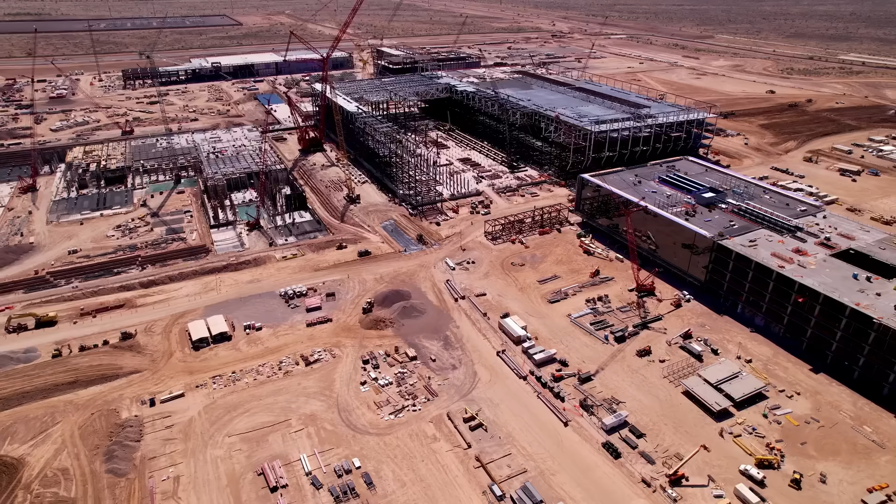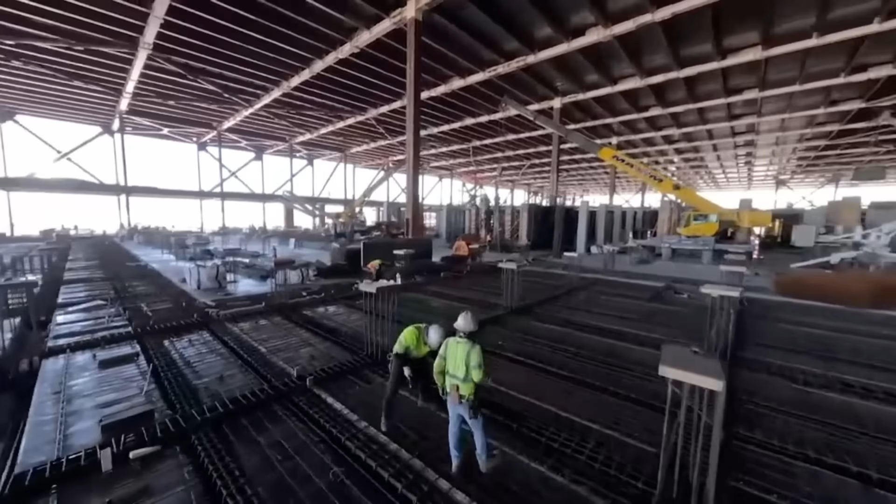In late 2024, a $40 billion chip factory rises from Arizona's desert, aiming to recreate the magic of TSMC's world-leading Taiwan fabs. The stakes are high. This is where chips for iPhones and AI supercomputers will be born.

Yet early on, engineers faced a baffling dilemma. The facility had to import ultra-pure sulfuric acid from 6,500 miles away in Taiwan. American suppliers couldn't meet TSMC's standards, and local chemicals cost 5 times more. Even Intel, the veteran US chipmaker next door, jumped in to buy from these overseas shipments, a fact TSMC's CEO relayed with incredulity: "How did you live before? It was very hard before, but now you are here," he recalls Intel saying.

This real scenario reveals a deeper mystery. Why is it so hard to duplicate a cutting-edge semiconductor fab on US soil? In theory, a chip plant is a marvel of precision engineering that should be reproducible anywhere. In practice, every tiny variable, from the brand of pump to the length of a pipe, can throw off the delicate process.

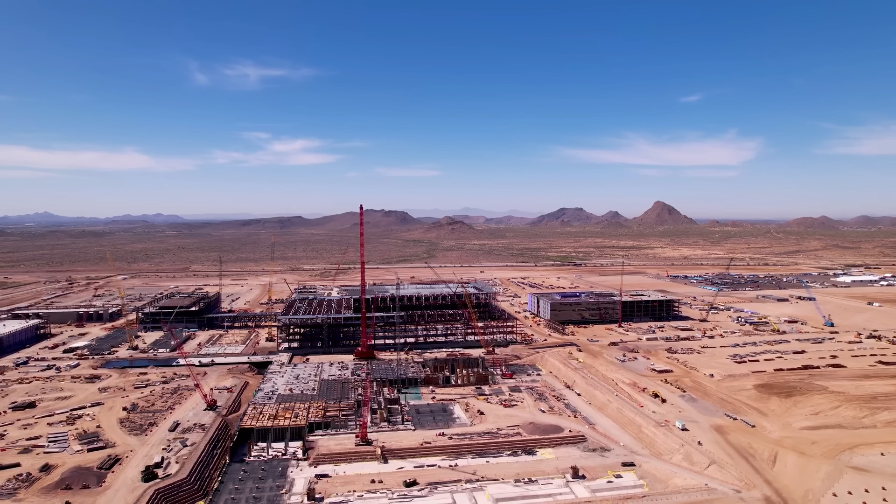The industry mantra is copy exact, meaning every detail must mirror the original fab to achieve predictable results. So when Taiwan Semiconductor Manufacturing Co. tried to clone its advanced factory in Phoenix, they encountered a storm of unforeseen challenges. This is the story of TSMC's attempt to copy-paste its success overseas, a story of smooth silicon dreams colliding with desert realities. We'll explore why a company that perfected chip making in Taiwan finds itself with a lot of sweat, tears, and all kinds of training in Arizona.

How do geology, water, and air in the American Southwest complicate processes measured in atoms? Why does a thriving supplier ecosystem in Asia prove so hard to replicate in the US? And what do these struggles mean for America's bid to onshore critical chip production?

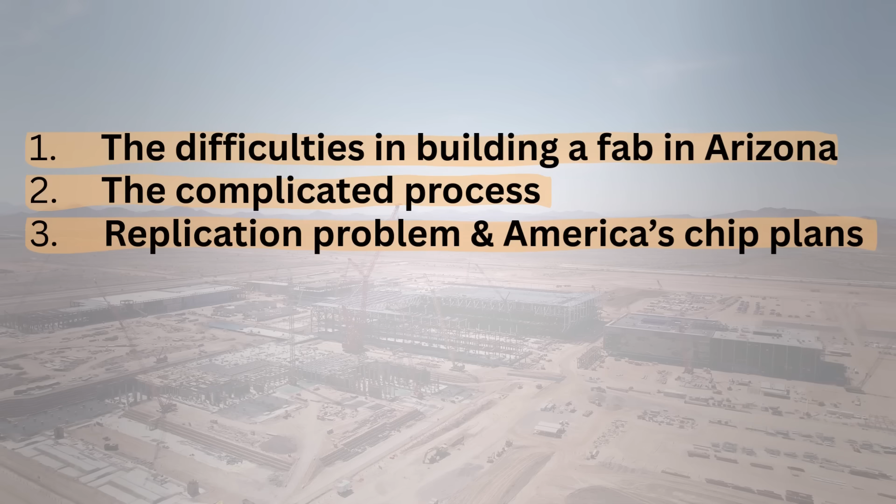TSMC, Taiwan Semiconductor Manufacturing Company, is the world's most advanced chip foundry, fabricating processors for Apple, Nvidia, and many others. In the semiconductor realm, yields are king. Yield refers to the percentage of chips on each silicon wafer that emerge flawless. A fab can churn out thousands of chips, but if even a speck of dust or a minor process variation causes defects, many of those chips become worthless.

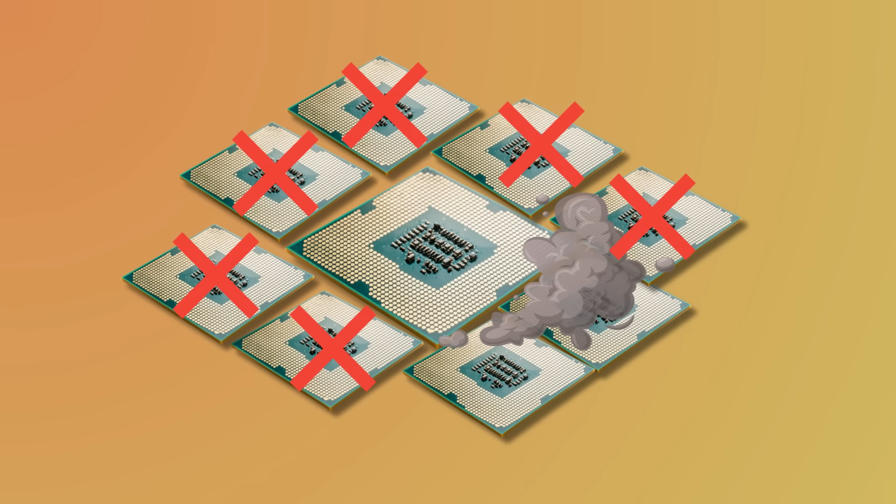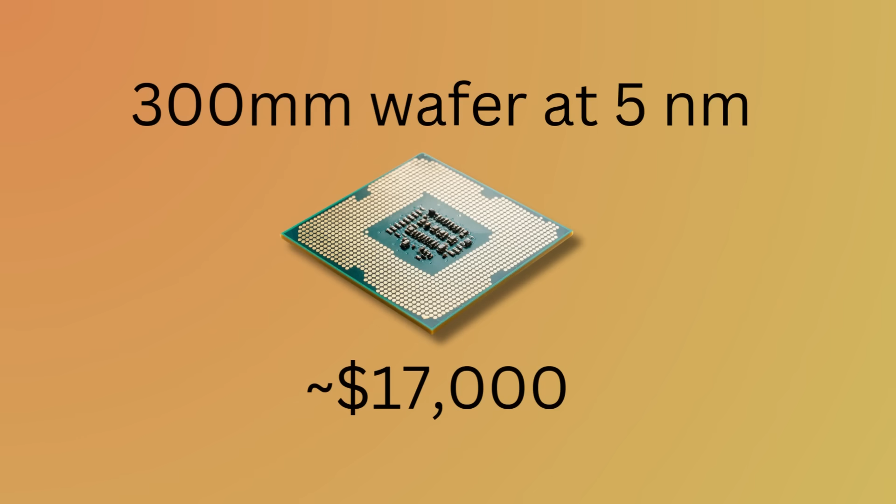Modern chips pack billions of transistors in areas smaller than a fingernail. Even a 4-nanometer wide particle can ruin a chip. High yield is critical because each wafer costs a small fortune. A single 300mm wafer at 5 nanometers can cost around $17,000 to produce. When yields slip, those costs explode.

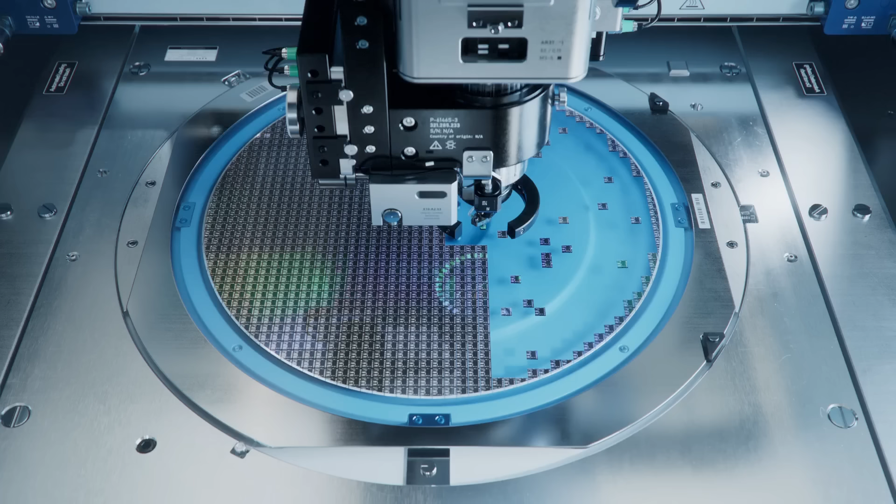As one engineer puts it, "Making a wafer is the most complicated manufacturing process in the world. I can't imagine anything else more difficult than this. It involves up to 4,000 precise steps with no room for error. The goal is to perfect those steps and repeat them exactly, over and over, wafer after wafer."

This is where the copy-exact philosophy comes in. Pioneered by Intel and embraced in spirit by chipmakers worldwide, copy-exact means that when you build a new production line or fab, you replicate every possible parameter from the proven facility. Same equipment models, same process recipes, same materials, down to using the same brand of valves, pumps, and filters, and even duplicating the lengths and routing of pipes and wires.

Why such obsessiveness? Because even trivial changes can produce different results at the nanoscale. The semiconductor process is a finely tuned orchestra. Swap a violin mid-performance, or a chemical supplier mid-process, and you might throw the whole symphony off key.

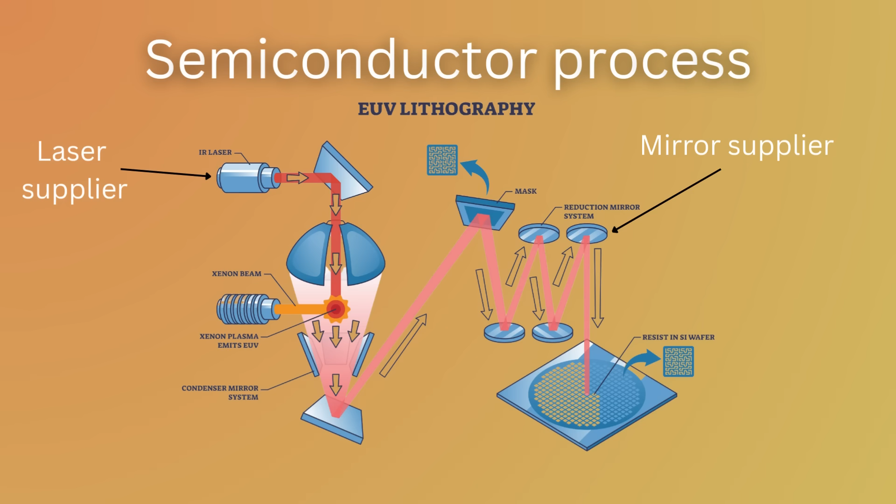Intel has credited its copy-exactly program with minimizing risk in new fabs. Since all factories use similar equipment, the copy-exactly process minimizes the risk of introducing errors when ramping up production. In other words, if you've perfected a recipe in one kitchen, you'd better rebuild an identical kitchen to get the same dish again. For TSMC, which leads the industry in chip yields and process technology, copy exact is an article of faith.

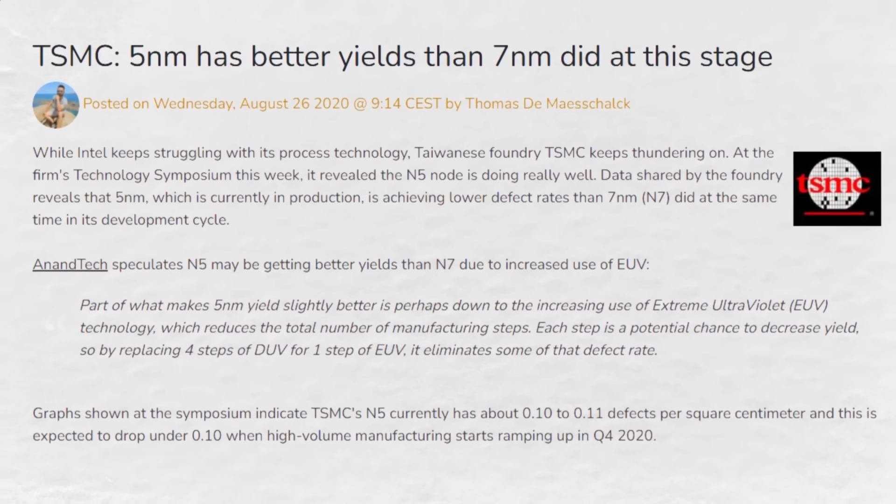It's how they achieve remarkable consistency. In 2020, TSMC boasted its new 5-nanometer process hit defect rates around 0.1 per square centimeter within months, meaning only one defect in a billion transistors or so. High yields translate directly to profit and production capacity. A few percentage points of yield can make or break a chip's economics.

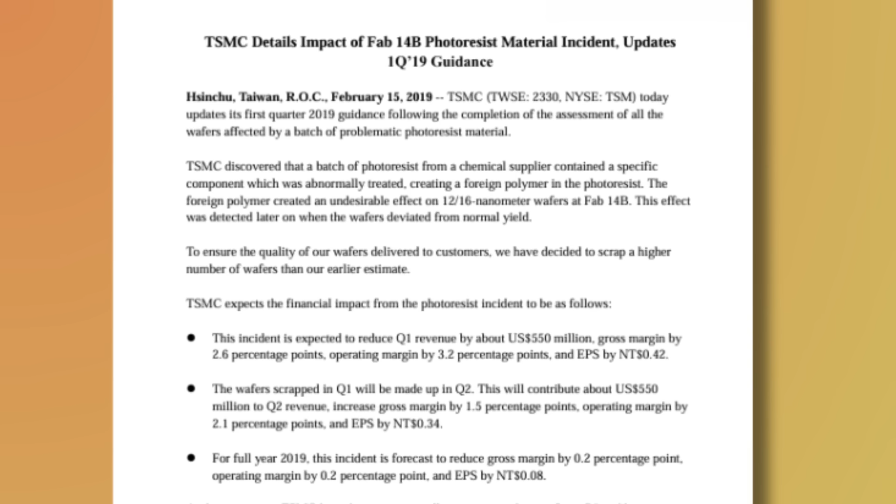Conversely, a yield problem can cost astronomical sums. A sobering example: in 2019, a single batch of bad photoresist chemical at TSMC's Fab 14 went undetected until wafer yields came out far below normal. By then, thousands of wafers were contaminated. TSMC had to scrap an estimated 10,000 to 30,000 wafers, eating a loss of about $550 million in revenue. One foreign polymer in a chemical, one tiny flaw, cascaded into over $500 million of damage.

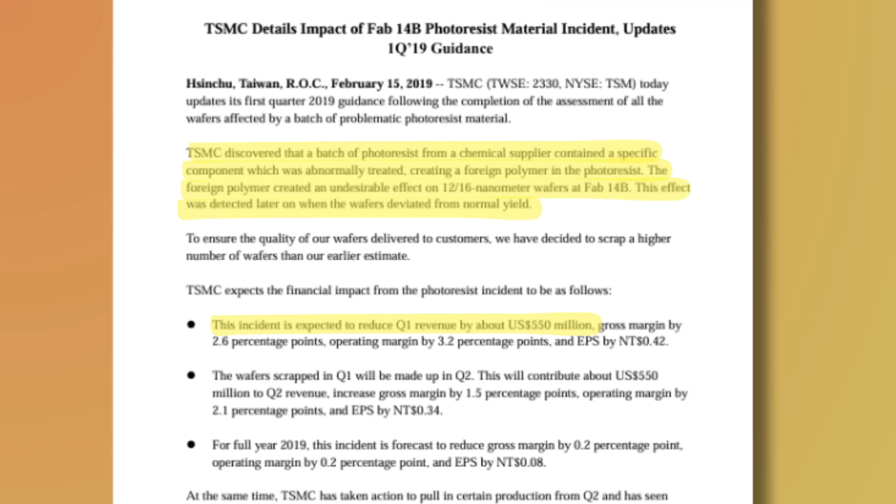This incident hammered home the point: vigilance over process consistency isn't paranoia, it's survival. So when TSMC agreed to build an advanced fab in Arizona, producing 5-nanometer class chips, later adjusted to 4 nanometers, for American customers, they knew the only way to succeed was to copy-exact their Taiwan operations.

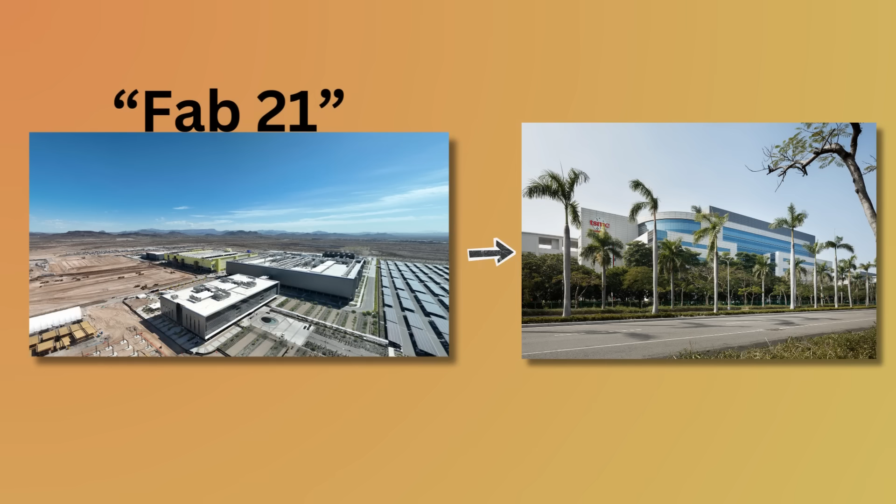The Arizona fab, designated Fab 21, would be modeled on TSMC's cutting-edge facilities in Taiwan's Tainan Science Park. In theory, TSMC tried to transplant not just the machines, but the entire manufacturing ecosystem that makes those machines hum. Yet almost immediately, theory met reality. TSMC's leaders candidly admit they underestimated what they were up against. Building the same fab on a different continent turned out to be far more complex than copying a blueprint.

Before we delve into the hurdles, let's frame why this duplication is so strategically important. The US government, via the CHIPS Act, is investing $52 billion to onshore semiconductor manufacturing. Washington's goals are part economic, jobs and tech leadership, and part geopolitical, reducing reliance on Asia's chip hubs, especially Taiwan, which lies under constant shadow of potential conflict. TSMC's Arizona project is a flagship of this effort, supported by an estimated $6.6 billion federal grant and other incentives. If TSMC can make top-tier chips in America at scale, it would bolster US tech sovereignty and mitigate the single point of failure risk of having so much capacity in one small island.

But if the Arizona fab struggles to meet the quality or output of its Taiwan siblings, it raises tough questions. Can the West really rebuild a self-sufficient semiconductor supply chain? Or are decades of specialization and clustering not so easily unwound?

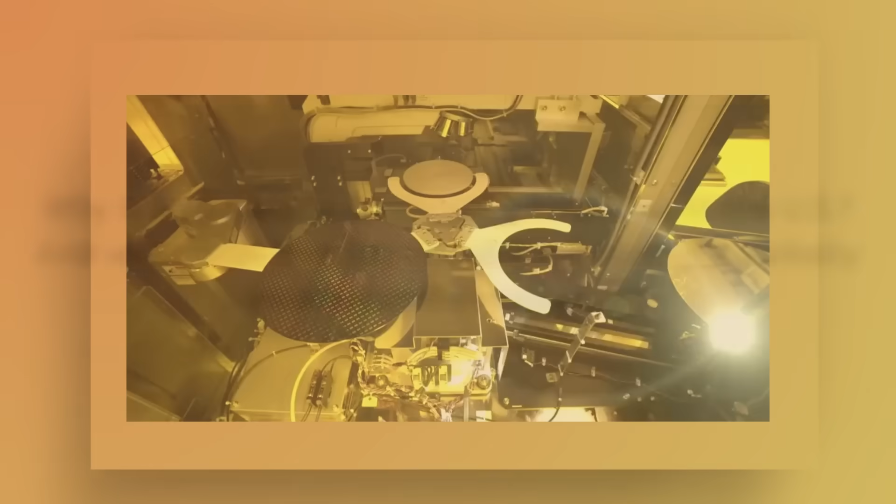As we unravel each challenge, the central mystery unfolds. Why is it so hard to duplicate a TSMC fab in the US? And what does that say about the future of a globally interdependent industry?

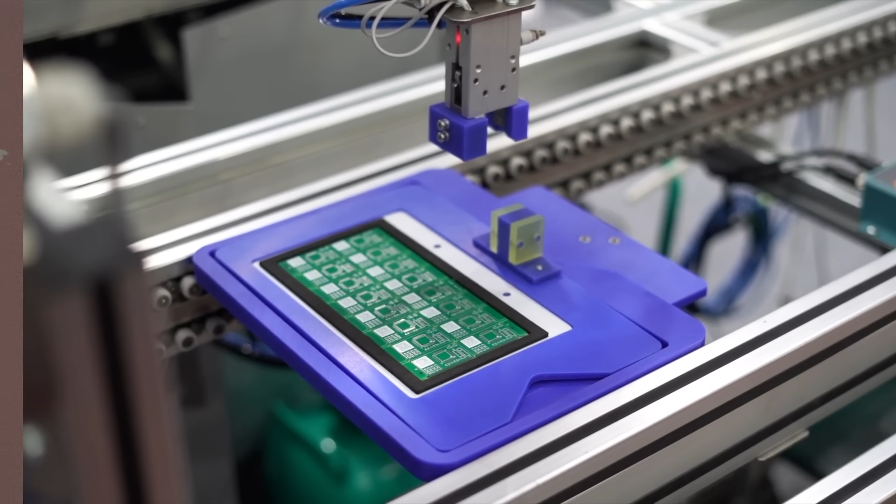Building a chip fab is not like building a typical factory. It's more akin to constructing a giant scientific instrument. These facilities are exquisitely sensitive to vibration, temperature, humidity, and contamination. Geology matters. Fabs need geologically stable ground with minimal risk of earthquakes or even subtle tremors that could disturb alignments. Chip manufacturing operates on tolerances of a few nanometers, billionths of a meter, especially in lithography, where a misalignment can ruin all the chips on a wafer.

In Taiwan, TSMC has learned to mitigate frequent minor earthquakes, for instance, using deep foundations and vibration dampers to isolate tools. Arizona, on the other hand, is geologically quiescent. It's not on a major seismic fault. In fact, this was one attraction. Beyond water, chip fabrication requires geologically stable ground, low humidity, and a positive business climate, notes Paul Westerhoff, an Arizona State University engineering professor. By that measure, the desert north of Phoenix is ideal, solid bedrock and little natural shaking.

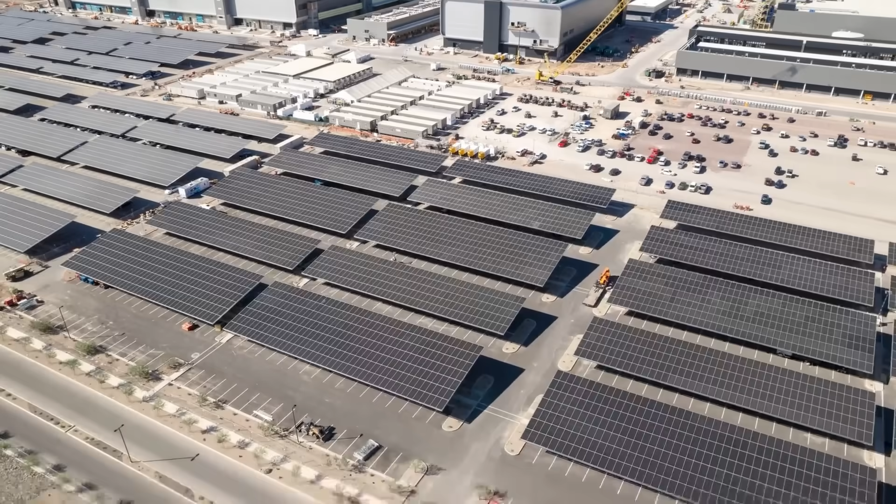But being stable isn't enough. The site must also be prepared to absorb man-made vibrations from nearby roads, construction, etc., and support extremely heavy equipment. A single EUV lithography machine, for example, weighs over 100 tons and uses lasers so sensitive that any vibration can blur the microscopic circuits it draws. Arizona's site had to be graded and its fab foundation meticulously engineered for this task.

Water is another silent factor. Fabs slurp tremendous volumes of water to achieve the required cleanliness. Semiconductor manufacturing demands ultra-pure water, UPW, to rinse wafers after various process steps. Ultra-pure means water stripped of every mineral, every ion, virtually every molecule that isn't H2O. It's often said this water is so pure it's unsafe to drink, as it would leach minerals from your body. Each wafer might be washed dozens of times through its fabrication. A modern logic fab can use millions of gallons of water per day, enough to supply a small city.

That sounds incompatible with an arid region like Arizona, which faces chronic drought. Indeed, observers scratch their heads. Why build such a water-intensive plant in the desert? TSMC, conscious of this, pledged advanced water recycling. In Taiwan, during a drought, TSMC has even trucked in water to keep fabs running, so they know water risk well. In Phoenix, they are building a state-of-the-art industrial water reclamation plant on site.

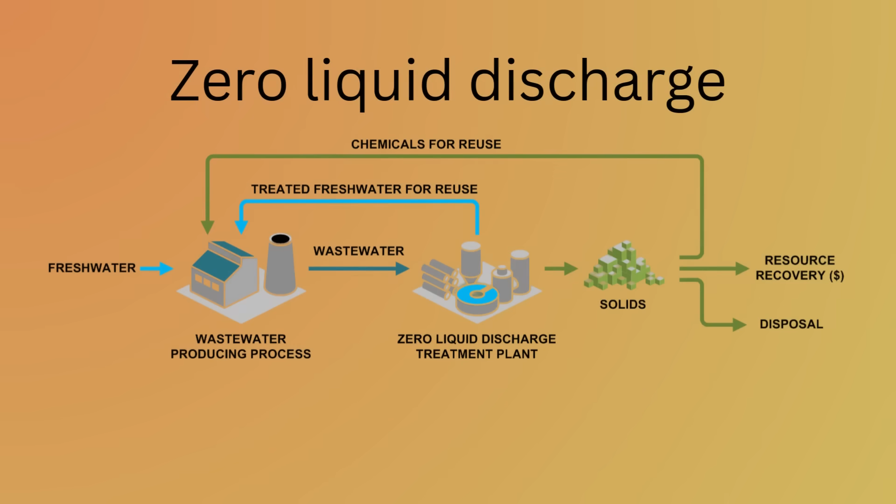TSMC Arizona says it will reclaim about 65% of the water it uses, with a goal of eventually reaching near 100% net zero water use. Essentially, they plan to treat and reuse wastewater for cooling and other non-process uses, and possibly even repurify some of it back into UPW. This approach, known as zero liquid discharge, means almost no wastewater leaves the facility. It's costly. Fabs in Arizona voluntarily do zero liquid discharge. It costs them a lot more. But they do it because it is part of operating in the desert, Westerhoff explains. Over time, these conservation measures can make Arizona's fabs among the most water-efficient in the world.

Ironically, being in a water-scarce area is spurring innovations that could set new standards globally for water recycling. However, not all water challenges are purely quantity-based.

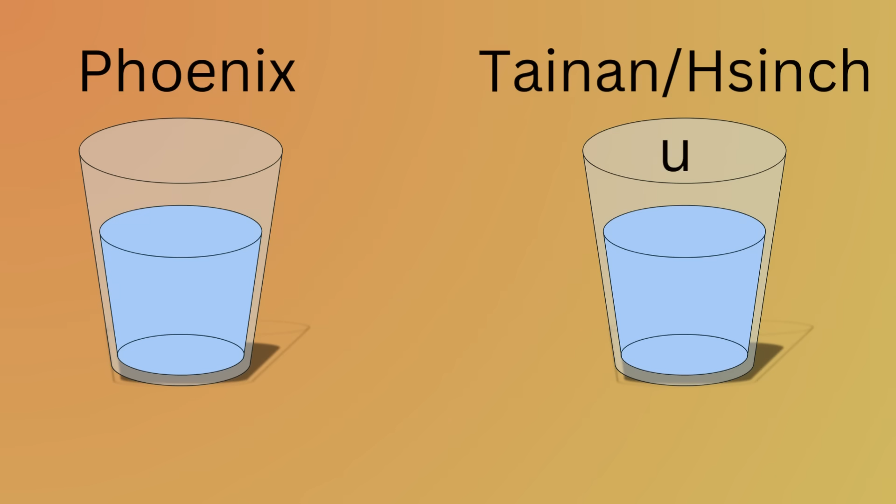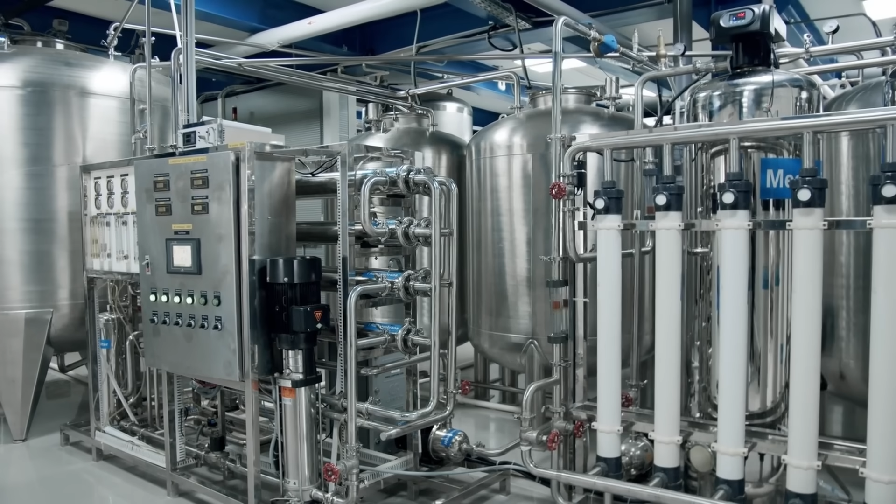Water chemistry differs by locale. The raw municipal water in Phoenix has a different mineral profile than Hsinchu's or Tainan's water. This affects the filtration and purification process. TSMC essentially built a duplicate ultra-pure water plant in Arizona, but slight differences in input water could mean tweaking the

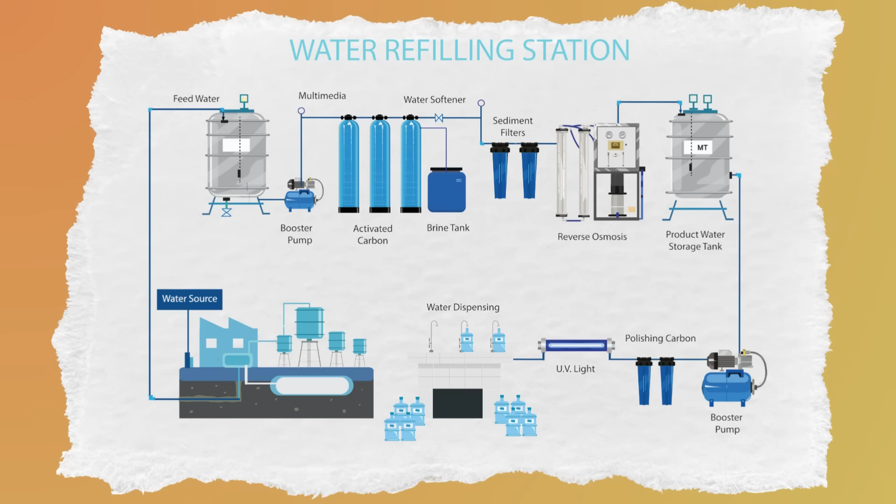treatment stages, more filtration here, different membrane there, to reach the same purity. Moreover, once purified, the water must stay pure through miles of piping, an area where the copy-exact philosophy kicks in. If the Taiwan fabs use stainless steel pipes of a certain grade and length, the Arizona fab would try to use the exact same to avoid unexpected leaching or contamination.

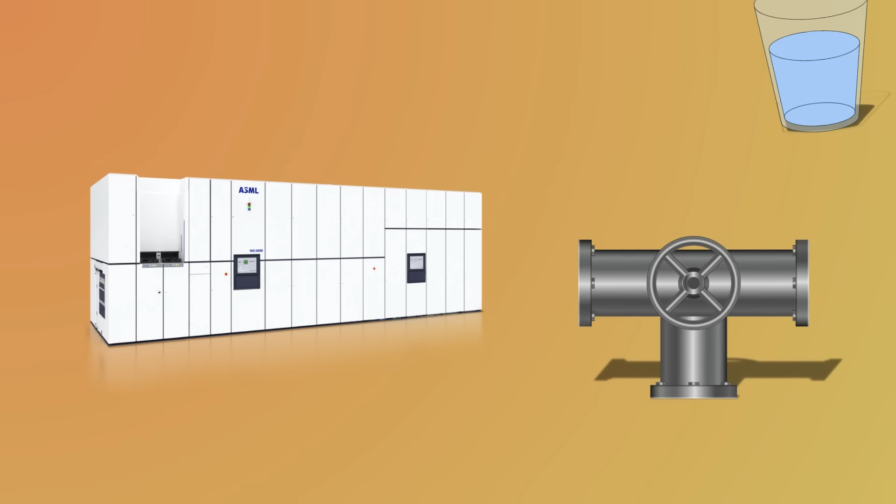This level of replication can be surprising. It's not just the big tools, but even piping materials and lengths that matter. In the end, after intensive effort, TSMC is confident its Arizona water treatment system can deliver equally pristine H2O.

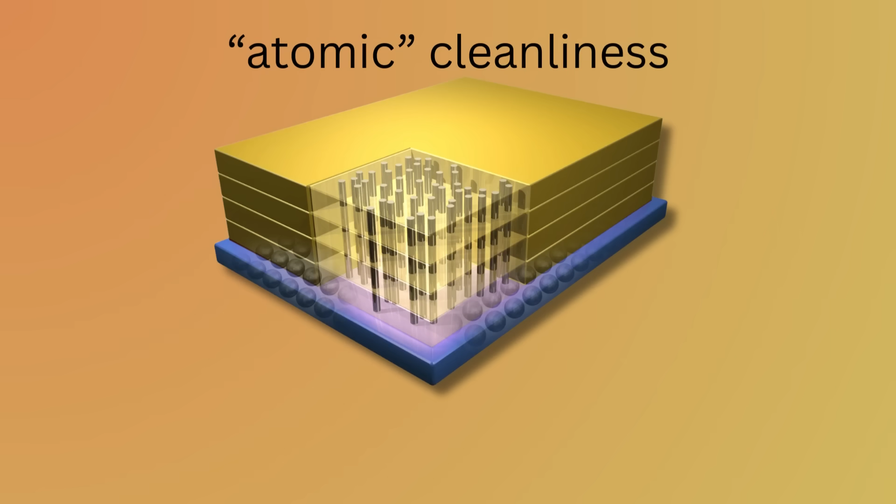They will need it. Each chip layer, and there are 20, 30 or more layers, must be rinsed to atomic cleanliness. As Westerhoff describes, modern chips have features so small, on the order of 4 nanometer gaps, that even the smallest particle can get stuck and ruin the semiconductor.

That's why thousands of gallons of ultra-pure water are used to wash away every last speck of particles and chemicals at each step. Then there's the air. Arizona's air is famously dry and generally very clean in terms of man-made pollutants. Low humidity is actually a boon. Moisture in clean rooms can cause unwanted reactions or allow trace contaminants to travel. In chip lithography, too much humidity can interfere with photoresist chemistry.

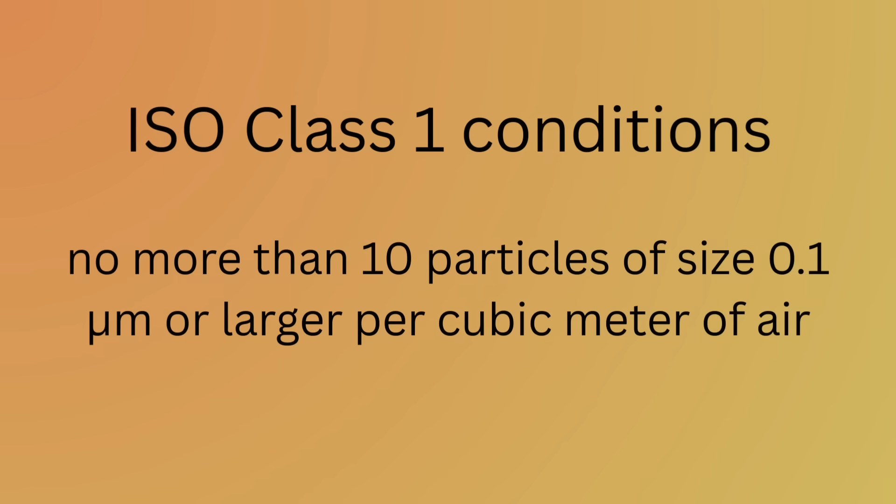So the desert's dryness helps. But Arizona has its own phenomenon: dust storms. Seasonal haboobs can send clouds of fine dust sweeping through Phoenix. Fabs are sealed with advanced HVAC systems and filters, of course, but a massive dust storm is a test of those defenses. The clean room must maintain ISO Class 1 conditions, no more than 10 particles of size 0.1 micrometers or larger per cubic meter of air, exceedingly clean. Outside, a desert wind can carry thousands of particles per cubic meter. Thus, the facility's intake filtration and positive air pressure systems have to work overtime.

It's not an insurmountable issue. Fabs have existed in desert environments. Intel has run fabs in Arizona for decades without incident, but it requires vigilant maintenance of filters. Air quality control is part of the hidden art of fab operations.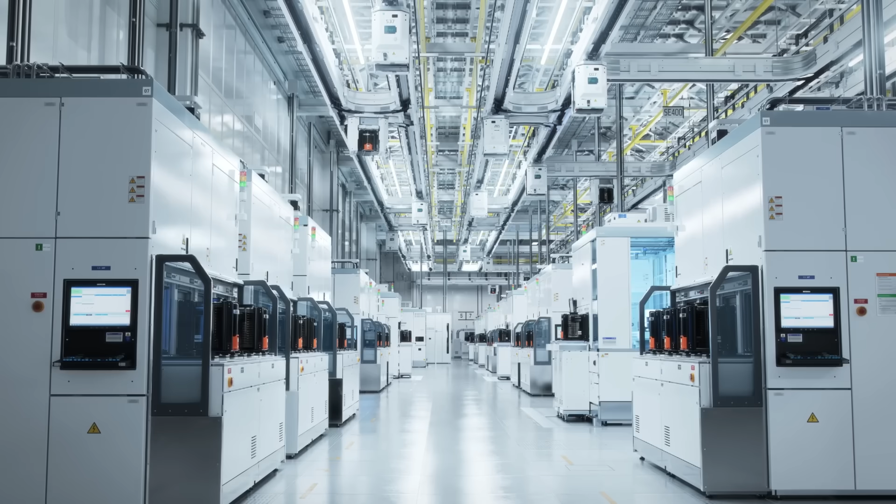Cleanroom contractors from Taiwan were brought in to ensure the Arizona fab's airflow and filtration match TSMC's specs. These companies, like UIS and others, have been busy. Orders for cleanroom systems have surged as TSMC and others expand overseas. In fact, TSMC's Arizona fab is roughly double the cleanroom size of a typical logic fab, indicating how much infrastructure is being built to keep dust out.

Cleanrooms are designed to eliminate dust, airborne particles, and other contaminants that could damage sensitive components, an absolute must when features on chips are far smaller than a single dust particle. Temperature is another factor, albeit easier to control with brute force HVAC. The desert sees scorching heat in summer, but the fab's climate control doesn't really care what's outside. It will cool and dehumidify the incoming air, regardless of 115-degree Fahrenheit temperatures.

In short, from a physical environment perspective, Arizona is not a bad location for a fab. It's seismically calm, dry, and has abundant land. TSMC's site is a sprawling 1,129-acre campus in North Phoenix, with plenty of buffer zone. Yet, it's all the subtle differences, the water, the air, the local building codes and permits, as we'll see, and even the soil, that mean a copy fab can't ever be 100% identical.

As one TSMC manager analogized, running the same process in a new place is almost like when you bake a cake at high altitude versus low altitude. You're still baking the same cake, but you have to make some fine-tune adjustments. In Taiwan's recipe, they know exactly how the cake rises. Arizona is a high-altitude kitchen, figuratively speaking, and it's forcing them to relearn those fine adjustments.

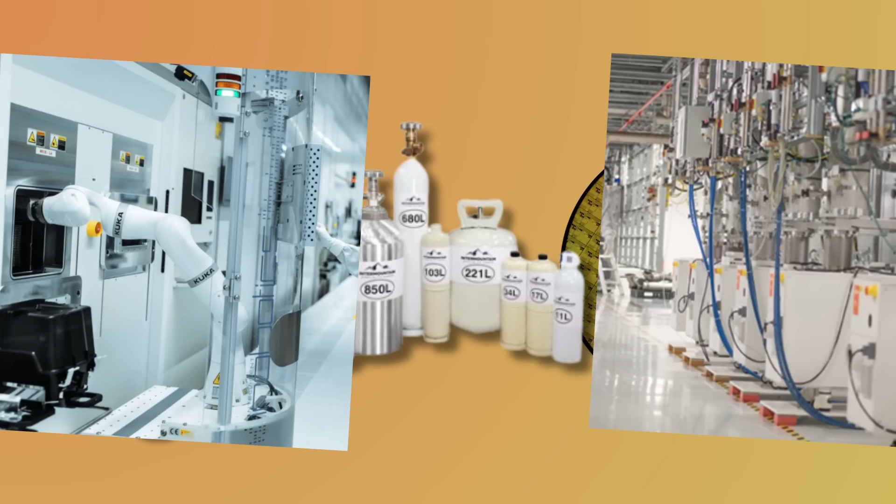Beyond the bricks and mortar of the fab itself, one of TSMC's biggest challenges in Arizona has been rebuilding its supplier ecosystem from scratch. In TSMC's home base, Hsinchu and Tainan, Taiwan, there exists an extensive, dense web of suppliers and contractors that collectively support fab operations. Within a short drive of TSMC's fabs are companies that provide ultra-pure chemicals, specialty gases, silicon wafers, spare parts, sub-tool components, maintenance services, precision cleaning, and waste management, essentially every little thing a fab might need, often on a just-in-time schedule.

This ecosystem didn't appear overnight. It's the product of 30-plus years of Taiwan's semiconductor industry growth. Many of these suppliers are accustomed to meeting TSMC's exacting standards. Some, like gas suppliers, even run pipelines directly into the fab complexes.

So when TSMC builds a new fab in Taiwan, it can easily tap into this network and know that the critical materials will arrive with the right purity just in time. And if a tool breaks, a local technician or spare part is close at hand.

In Arizona, by contrast, TSMC plopped down a leading-edge fab in what was, until recently, open desert. The Phoenix area does have some semiconductor presence—Intel's massive campus in Chandler, some ON Semiconductor and NXP legacy Motorola facilities—but it lacks the complete ecosystem for cutting-edge nodes. Many of the chemicals and materials required for 5 nanometer or 4 nanometer processes simply were not produced in the US at the necessary purity or volume.

TSMC discovered this quickly. C.C. Wei, TSMC's CEO, recounted that American chemical suppliers cannot produce the grade that TSMC needs, and if they tried, the price was exorbitant, 5 times higher than in Taiwan.

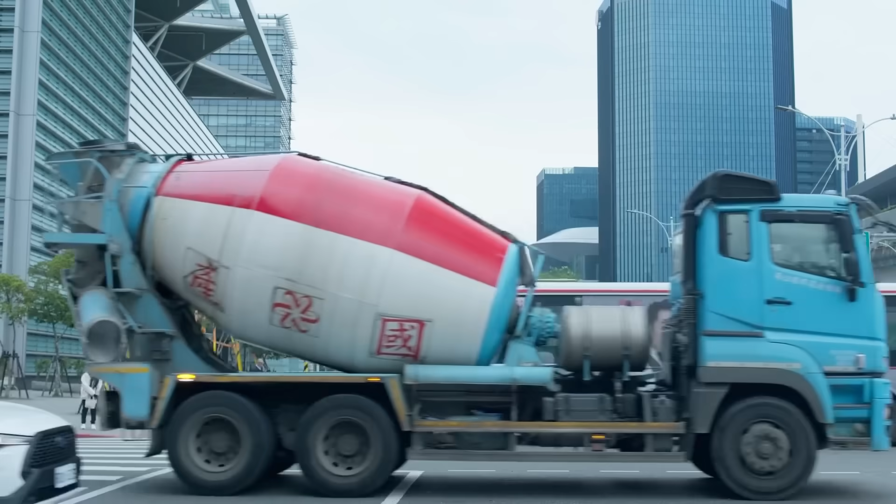The situation with sulfuric acid was not unique. Other specialty chemicals, developers, etchants, gases like neon and xenon, etc., and even raw silicon wafers often had to be imported.

Over the past 2 years, a number of TSMC's key suppliers have announced plans to set up U.S. operations, often in Arizona or neighboring states, to support the fab. For instance, Sunlit Chemical, a Taiwanese company, opened a plant in Phoenix in late 2024 to produce high-purity chemicals locally. Industrial gas suppliers, filtration companies, and equipment component makers—in total about 14 key suppliers—have committed to establishing facilities in Arizona, creating a mini-cluster around TSMC.

This is a positive development. It shows the clustering effect in motion. The Greater Phoenix Economic Council noted that since TSMC's announcement, 39 semiconductor-related companies have relocated or expanded in the region, bringing over $37 billion in investment.

In time, Phoenix might build its own robust semiconductor ecosystem. But these things take time, often years to build plants, train workers, and reach the quality levels required. In the interim, TSMC must deal with a supply chain that is longer and more fragile than what it enjoys in Taiwan. Longer supply lines mean more inventory must be kept on hand as a buffer, which ties up capital.

And complicates logistics. If a chemical is coming by ship from Asia, TSMC can't get it on a few days' notice. They need to plan months ahead and stockpile, or pay to fly material in at great expense for emergencies. The just-in-time rhythm is disrupted, and when something goes wrong, it can become a crisis.

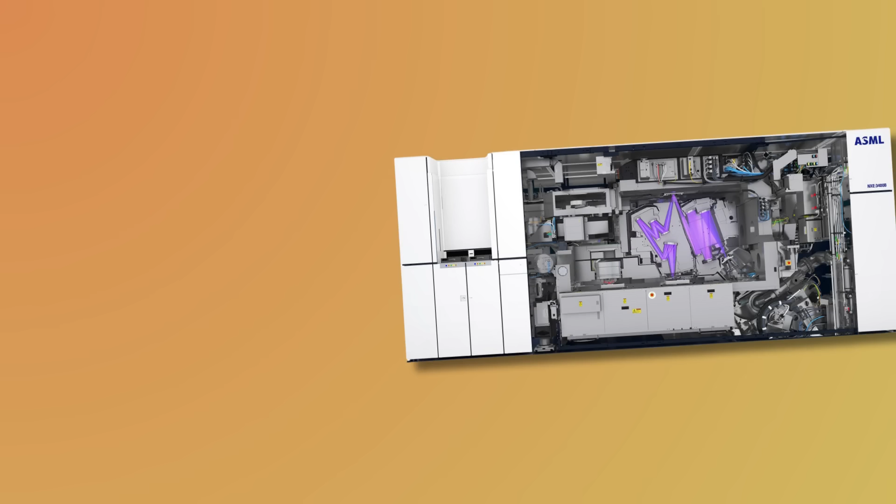Another major gap: equipment maintenance and spares. Chip fabs rely on incredibly complex machinery—think ASML's 150 million dollar EUV scanners, and a myriad of supporting tools. In Taiwan, equipment vendors like ASML, Applied Materials, Lam Research, etc., have local offices and parts warehouses near the fabs. Many second-tier tool firms and third-party service providers are also nearby.

In Arizona, some of that exists. ASML, for instance, has a presence to support Intel's fabs. But ramping up a fab requires a small army of vendor field engineers and a supply of spare parts.

TSMC ended up bringing hundreds of experienced technicians from Taiwan, both its own staff and supplier engineers, temporarily to Arizona to install tools and train the local team. This became a point of cultural friction, which we'll discuss later, but it was unavoidable.

Without the seasoned experts, the highly calibrated tools could not be brought online as efficiently. Copying a fab means copying the know-how, not just hardware. TSMC essentially transplanted a slice of its Taiwan workforce to Phoenix to duplicate the tacit knowledge of running these machines.

Yet another wrinkle: U.S. labor and construction practices. To physically construct the fab and the supporting facilities, TSMC needed contractors experienced in chip fabs. In Taiwan, they have trusted contractors who can build a fab in a blink of an eye by industry standards. TSMC often boasts of its construction speed.

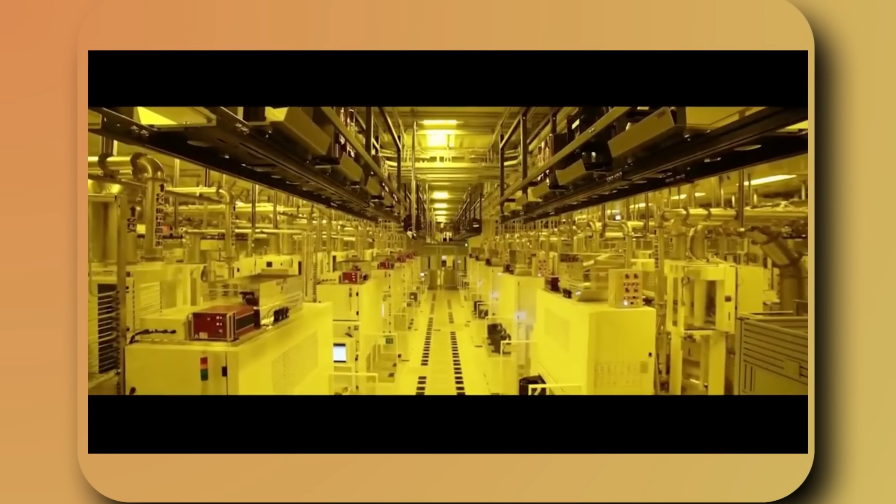The local construction workforce had never built a leading-edge fab like this. Many workers didn't even know what a cleanroom production line entailed. TSMC discovered that the pool of skilled labor was insufficient, so they ended up recruiting half of the construction workers from Texas, essentially importing workers from another state at higher cost for their expertise.

Even basic things, like complying with US safety standards and dealing with trade unions, were new experiences for TSMC's management. Wei noted that labor unions introduced delays and complexities TSMC wasn't used to. The CHIPS Act funding required union labor or prevailing wages, ensuring high labor standards but also higher costs.

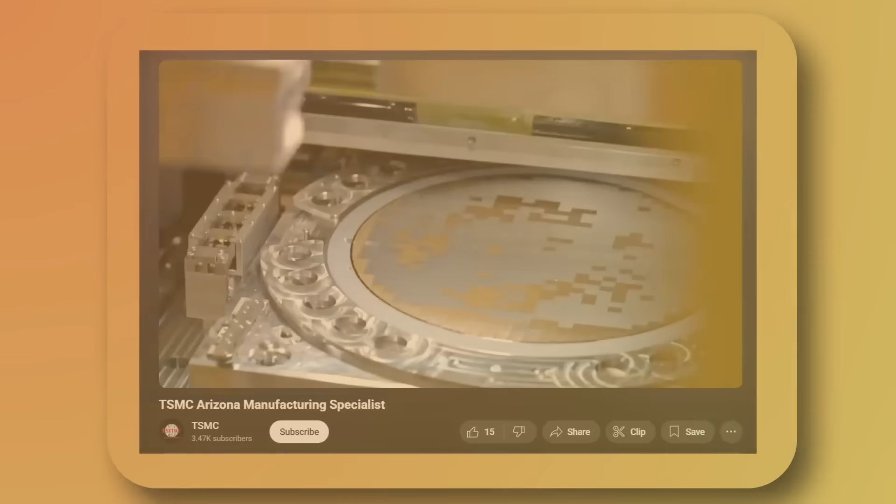And about those costs, nearly every aspect of fab construction and operation in Arizona has proven more expensive than in Taiwan. Morris Chang, TSMC's founder, bluntly stated that making chips in the US may cost 50% more than in Taiwan, and in the Arizona fab's case, it might be closer to 100% more, double the cost.

Multiple reasons drive this. US labor wages are higher. Productivity in this specific domain may be lower initially. Building materials and cleanroom components can cost more when sourced in the US, and the new supply chain lacks the economies of scale of the Taiwan cluster.

A Nikkei Asia report revealed that several suppliers' own Arizona projects were halted or delayed because construction costs ballooned to 4 or 5 times what they would be in Asia. Executives from chemical suppliers were shocked at how expensive it was to build in Arizona, far beyond their initial estimates.

For example, companies like LCY Chemical, Kanto PPC, Topco Scientific, and Changchun, all key materials suppliers, bought land in Arizona to support TSMC and Intel, but by early 2024, they hit pause. Some projects were scaled back, others delayed indefinitely.

The flood of simultaneous construction, TSMC, Intel, and others all building at once, led to labor shortages and surging wages in the construction sector. It's a classic bottleneck. You can throw money at it, but skilled tradespeople and specialized contractors can only do so much at a time.

The Phoenix area is even marketing itself as the Silicon Desert, with plans for a gigantic surrounding development, Halo Vista, a $7 billion city within a city, including industrial parks and supplier hubs around TSMC's campus. In an optimistic scenario, a decade from now, Arizona could have a self-sufficient semiconductor cluster, not unlike Hsinchu Science Park, albeit at higher operating cost.

But getting from here to there is the tricky part. As one industry observer pointed out, it's baffling that TSMC was caught off guard by issues like permitting, unions, and supplier gaps, all foreseeable. A TSMC shareholder vented that these should not have been surprises for a world-class company, suggesting perhaps TSMC tried to move faster than prudent and is now learning the hard way.

Regardless, the company is adapting. They've brought on US supply chain experts, partnered with ASU and local colleges to create a talent pipeline, and they continue to ship boatloads of gear and materials from Taiwan to bridge the gap. Wei remains confident that the Arizona fabs will eventually produce the same quality chips as Taiwan. It just might cost more and take longer to get there.